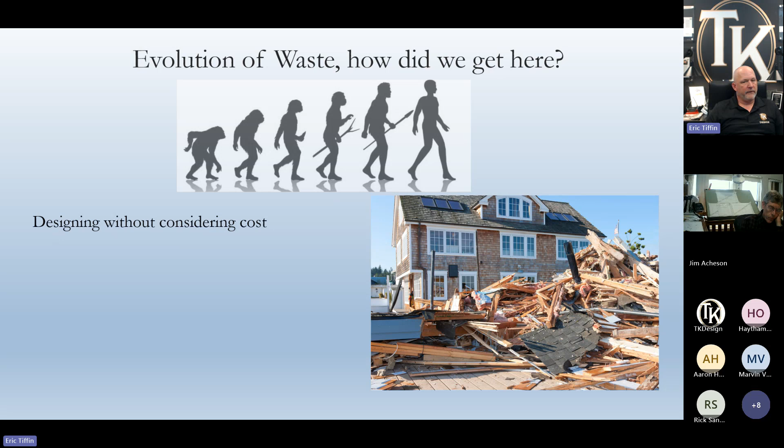Now, how do we get to the point where our homes or our processes have a bunch of waste? There's a lot of factors that can affect this, but as a team here at TK Design, there's some patterns that we notice. Number one is designing without considering cost. There's a million ways to put together a 3-bedroom, 2.5-bath plan, but to get the most bang for your buck, you want a designer that's got cost in mind as they're designing. And not everybody does this, and in fact, most don't. Cost savings really starts when the pen first hits the paper.

And there's code enforcement in different municipalities. Just because a certain building department wants you to modify something, it shouldn't affect every home you build. You could have a designated plan set for each city or project that you're working in with notes and details for that one community. And there's personal preference or ego. Oftentimes builders put stuff into a home that they would want in their own home. The reality is you're selling to your buyer, you're not selling to yourself. You're building for your buyer too, and what your buyer wants may not be what you would want in your own home. Then there's that's-how-we've-always-done-it mentality, and the truth is resistance to change means you're never going to learn and grow.

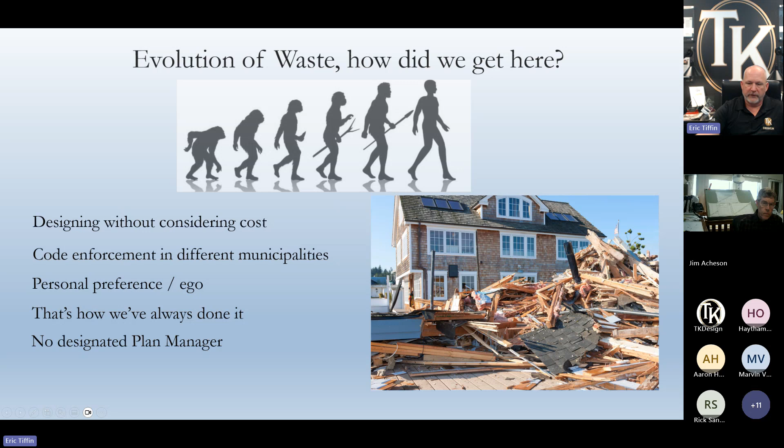And no designated plan manager, this is a pretty big one. We often see this in bigger companies that are selling more homes. You should have one person designated as the plan manager in your organization. Any requests or revisions, no matter who they come from, are discussed as a team and implemented and managed by one person in your organization. And they are the liaison between your team and your architect or internal design team.

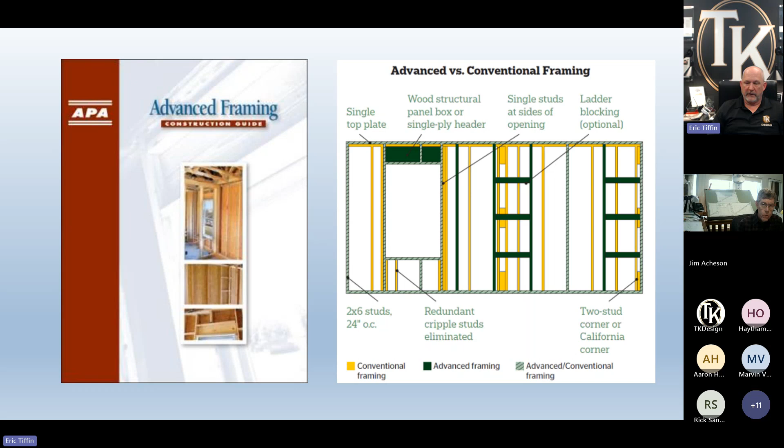Now, the top 7 things we commonly see here at TK Design that, if addressed, can easily save you money on every build. Number 1 is going to be in framing material. The amount of framing material needed for any project can vary greatly. If you compare 2 homes with the same square footage, bedrooms, bathrooms, etc., the framing material needed to build the home could be vastly different. You can easily reduce waste in your material by learning where to look for waste. Now, there's a lot of books out there that are available on advanced framing, and there's some good information in these, but they're no substitute for actual boots on the ground and walking your homes.

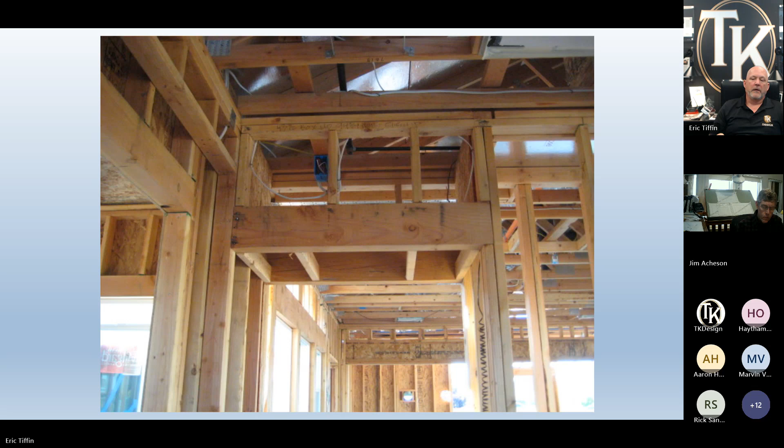Now, thankfully, the price of lumber has cooled down a bit, but we all know the impact that the price of lumber can have on a home. So now more than ever, it's critical to cut waste wherever we can in this area. During one of our many site walks, we spotted this. It was a pass-through from one space to another, and the plans required the framer to drop the ceiling in this area, but had no particular reason for it.

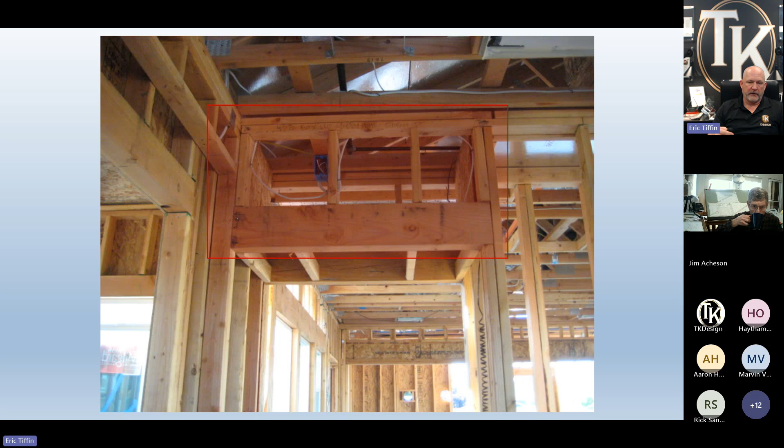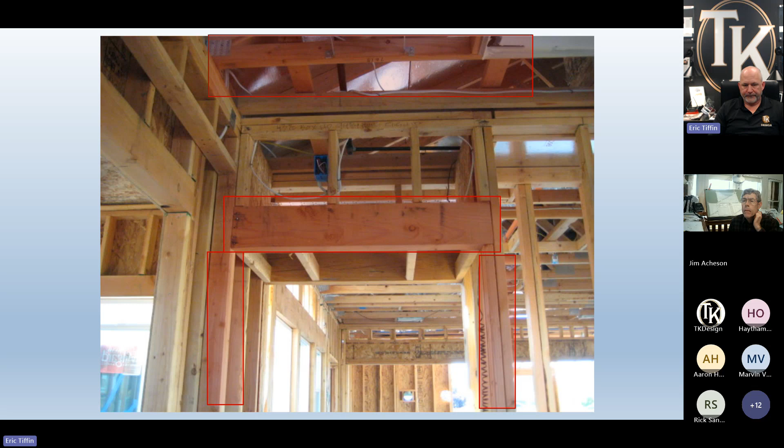So if you look close, you can see the roof framing runs parallel with what could be a header. And then on one side, you got a jack stud under that header, and on another side, you don't. So looking at all this, we see that this is probably a non-load bearing wall. Also see nailers here that are totally unnecessary. Drywall spans 2 foot on center. And in these areas, there's less than 2 feet between them, so you actually don't need them.

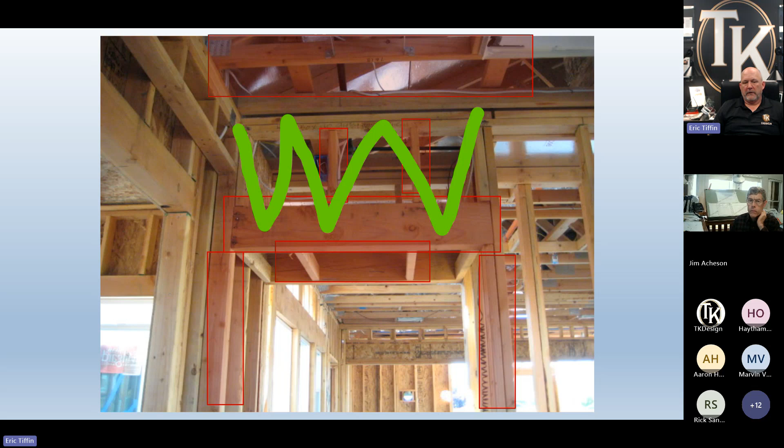I would eliminate this entire thing, savings about $20 for this particular instance. And it doesn't sound like a lot, but imagine this happening 100 times a year. The numbers can get pretty big.

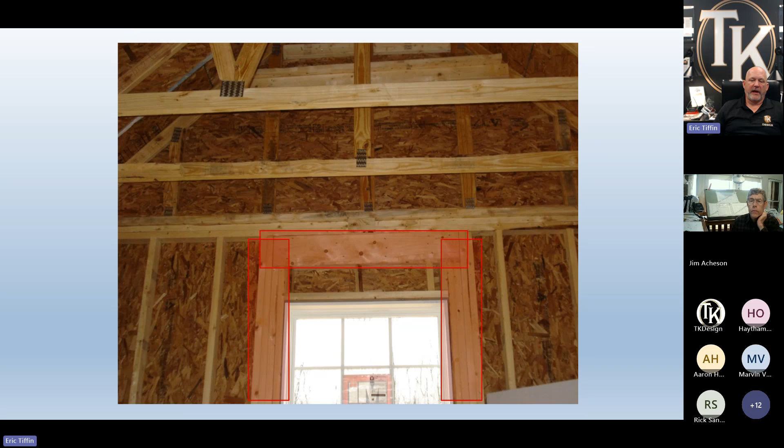Another example here, we see a double 2x6 header with 2 jacks and 2 king studs on either end. The gable end above was siding on the outside. There's really almost no weight there. We could have easily handled this with 1 jack and 1 king on each side of the header with a single 2x header, savings of about $20 in lumber. Now, it doesn't sound like a lot again, but where there's smoke, there's fire. When I see this, I know there's likely several more examples of this in the home.

Now imagine that happening 5 times in every home. And if the builder's selling 100 homes per year, that's about $10,000 in money spent unnecessarily just in throwing extra lumber at these windows. The added benefit to identifying things like this is that there's less labor time involved for your framer, and you could leave space above the window for a little bit of insulation to make a more comfortable home, which can now be showcased to your buyers.

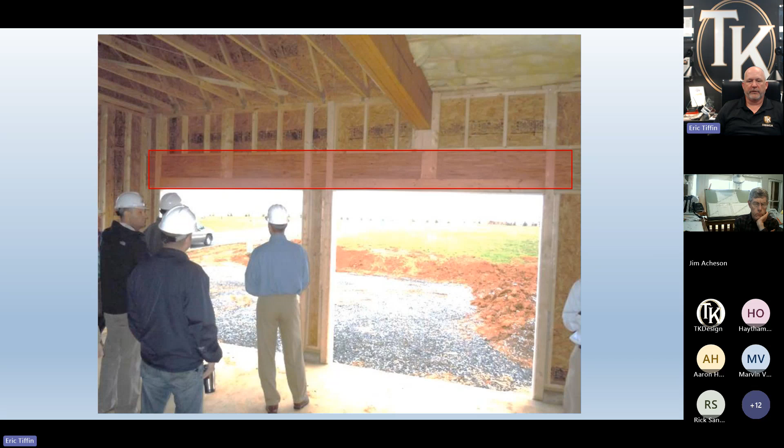Now, hopefully you're all seeing this. We've got a 4-ply LVL sitting down on top of engineered lumber over this garage door opening, which had to extend the full width of the garage because it was a portal frame. We dug a little deeper into this plan set and learned that that original LVL was totally unnecessary because it was intended for an option that got removed, which made also that header over the 2 garage doors completely unnecessary because the weight that was originally planned to be coming down on top of them didn't even exist.

Now, this is quite literally thousands of dollars wasted on this one build, and they've built this home many dozens of times. The message is schedule regular reviews of your plans with your team, and you never know what you're going to find.

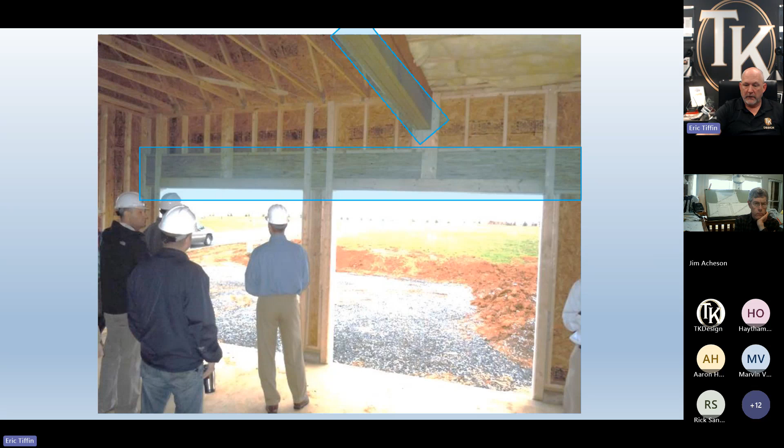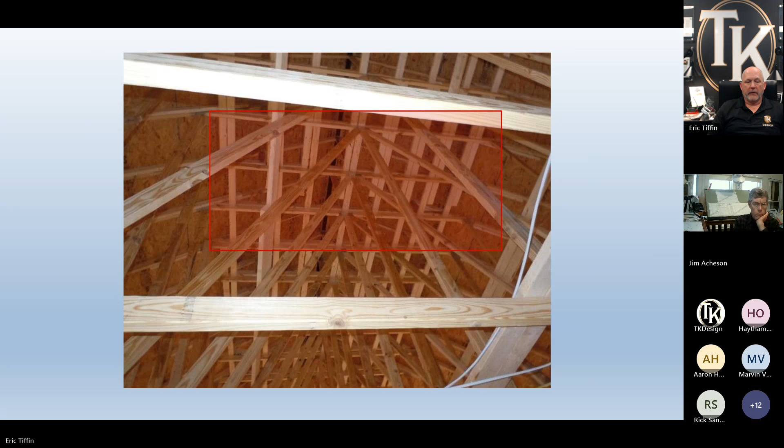Piggyback trusses. There's rules to how wide of a load a truck can carry over the road. If the truss height or load width exceeds those rules, we all know you're starting to add piggyback trusses in, which increases your labor and material costs because the trusses are now coming out in two pieces. A little bit of extra planning, you can lower your roof lines and you can eliminate those piggybacks.

Now, I am going to quote my colleague, Kyle Hunt. Let me see here. I'm trying to find a little laser pointer. I'm going to quote my colleague, Kyle Hunt, in this one. He's owner of Remodelers on the Rise, and here's what he calls his 5 Ps. Proper planning prevents poor performance.

What you're seeing here in the background is like a beam coming in on an angle that's dropped low, and you see the end of the beam cut on an angle here, and there's literally 10 studs surrounding that thing. According to today's prices, 10 studs is about 40 bucks, at least for the numbers I look up from Home Depot. Now, this likely could have been handled with 1 or 2 studs, providing a savings of around 32 bucks.

And the builder was having the lumberyard provide the engineering for this home, which is pretty common. The framer was ad-libbing because there was a lot of information missing from the plans. So he's just throwing as many studs under this thing as he needs to basically cover the bottom of it, and he's throwing 2 king studs on each end. Had my company provided the engineering, we would have called out the proper amount of jacks and kings on this beam. Now imagine this house being built 50 times.

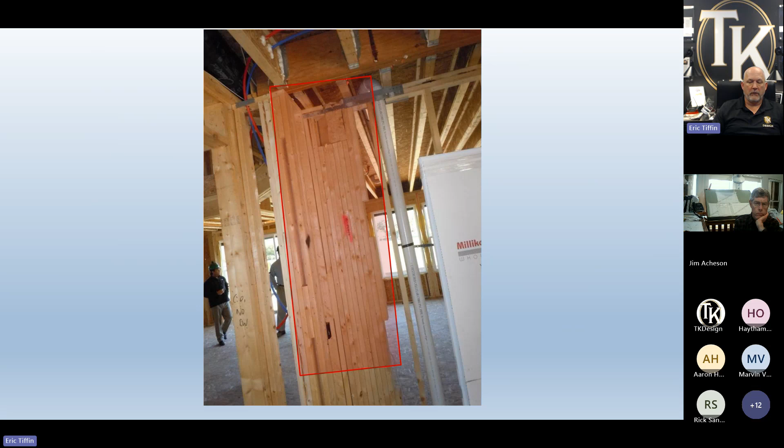That's a conservative $1,600 that could have been saved, plus the added benefit of less labor to install the studs, making the framers profit better, and bringing your company up a notch on the builder of choice ladder. The easier you make it on your trades, the more profitable they become, and the more likely they're going to want to work for you, which can translate into better savings for your team down the road.

Now, here's an easy one. Here we see 2 examples of a perpendicular wall intersection in framing. The one on the left has a full 2x6 stud between 2 more 2x4 studs to provide a nailer for the intersecting wall and for drywall. The image on the right shows the same condition, except the framer used scrap 2x4 horizontally.

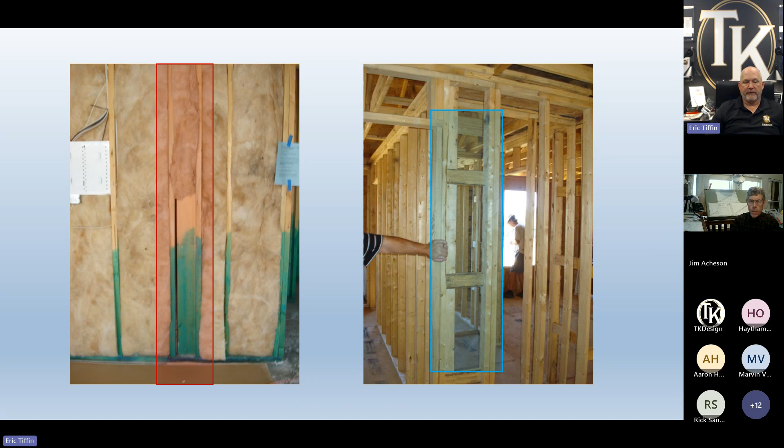I'd estimate the savings of about $15 for the single instance, but it was likely repeated a couple dozen times in the home. Imagine that happening an average of 25 times in one house at a construction company that's building 100 more homes a year. That's $37,500 per year for that one problem that can easily be rectified by providing a scope of work. And that may look something like this.

It's a simple concept that can come with tens of thousands of dollars in savings. The example on the right not only costs nothing, it reduces the amount of waste going into the dumpster. The example on the left shows how these methods actually add more lumber than what's necessary in the plans.

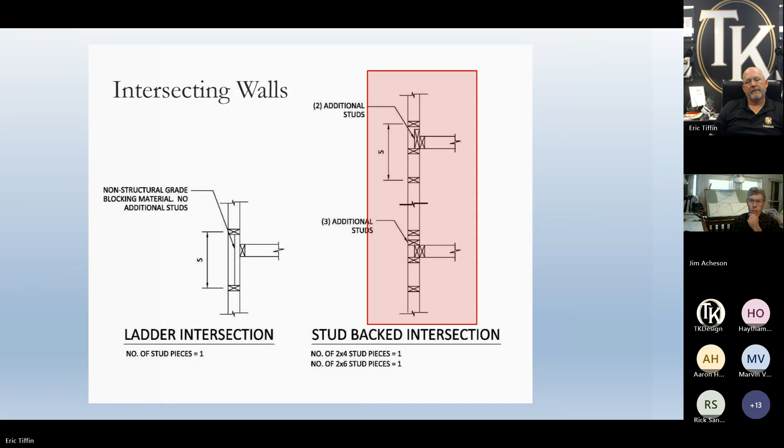If you estimate a conservative average of this happening 15 times in a home, because they have 15 windows or more fireplaces or whatever it is, for a construction company selling 100 homes per year, that's $36,000 that can easily go back to the company's bottom line every single year just for identifying something as simple as this.

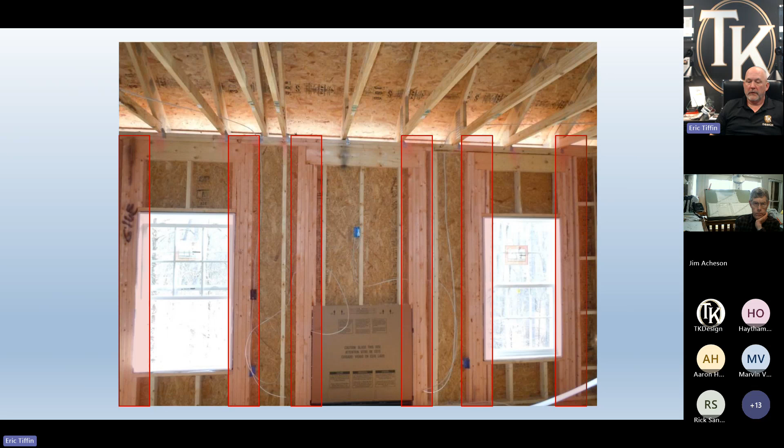Now, if you go the extra step with your architect, have them provide the proper engineering for the home, you can and will save money on every build. By simply calling out jack and king studs in framing, you can easily save that $36,000.

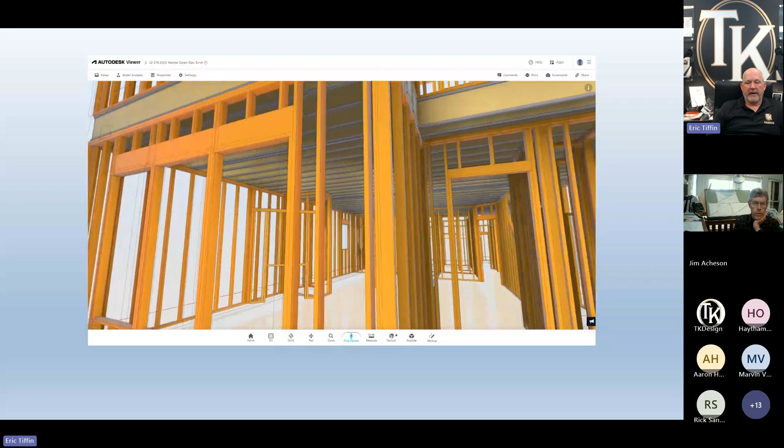Now, here's an example of some technology that we see today. Technology has increased leaps and bounds over the last few years. It's possible to provide a framing layout for your carpenters in a 3D digital model. A link can be sent to anyone and can easily be viewed and navigated on a phone or tablet.

If you have language barriers in the field, which we often see on job sites down in the southern parts, carpenters can now view the model instead of calling on a field manager to help answer questions. And from what we've learned throughout my travels, this can be a very valuable tool that can save the building company countless hours and avoid expensive framing mistakes.

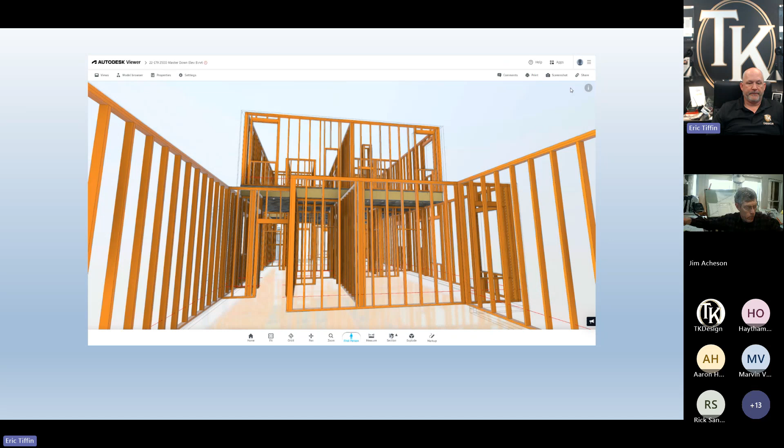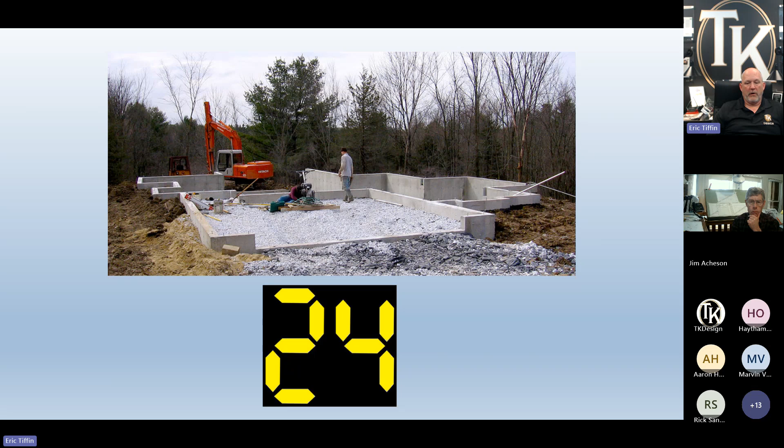Now, picture the impact this is going to have on a two-story home. Each corner is affecting every part of the home, from the foundation, wall framing, floor framing, roof framing, and every interior finish.

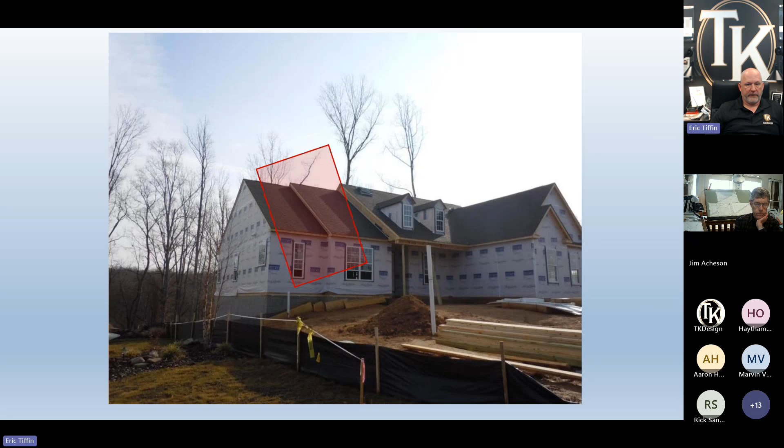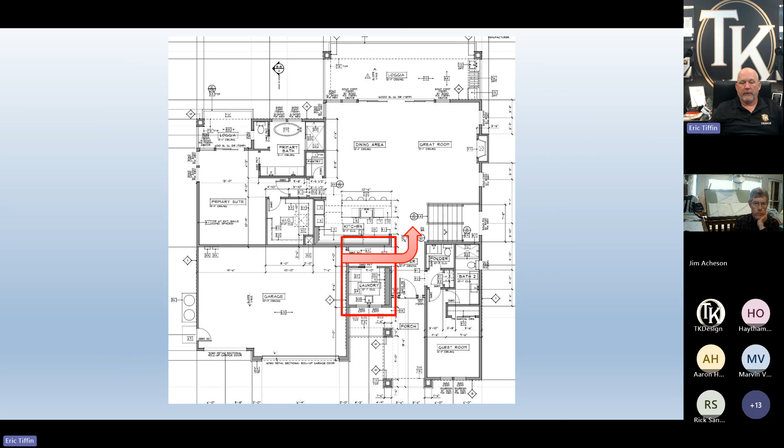Now, here's an example of how to square up a plan to reduce cost. And the goal was to reduce the amount of corners in the foundation. We also wanted to give more definition to the dining room and great room. Now, this plan didn't have a family entrance, and the path to the kitchen was longer than it needed to be, and there was no place to kick off your shoes or store your pocket full of stuff. So we took a stab at this on a redesign.

In this example, we've taken the same square footage and plan elements and reduced them to only 10 corners. We've separated the great room and kitchen, kept a loggia at the rear, but the roof lines have been simplified. The guest suite has improved traffic flow, and by moving it to a more central part of the home, we reduce the complexity of the front porch.

We've created a more appealing family entrance with a shorter path to the pantry and to the kitchen to make it easier to carry in groceries. And we've added a wine bar, which is always a popular option, because we had a little bit of extra square footage.

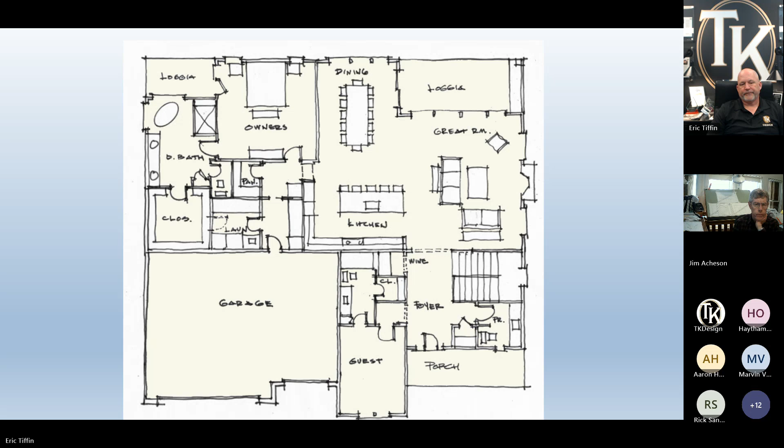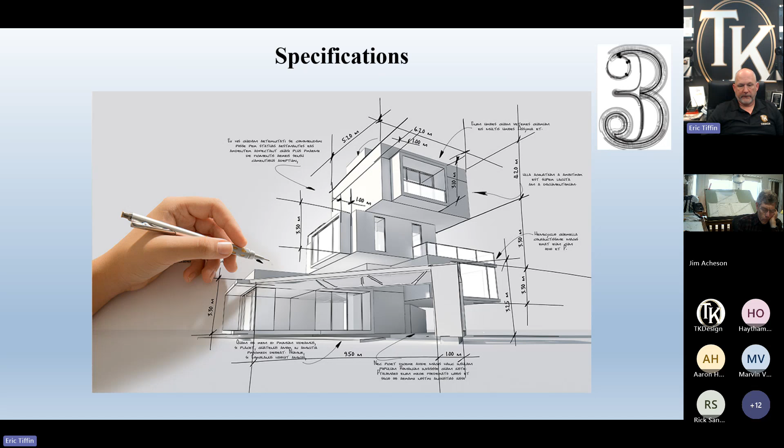Let's talk specifications. Here at TK Design, we don't like to get too specific on brand names, but we want to provide clarity and direction for the trades and suppliers. Having a clear set of framing plans for your trades can save you exponentially.

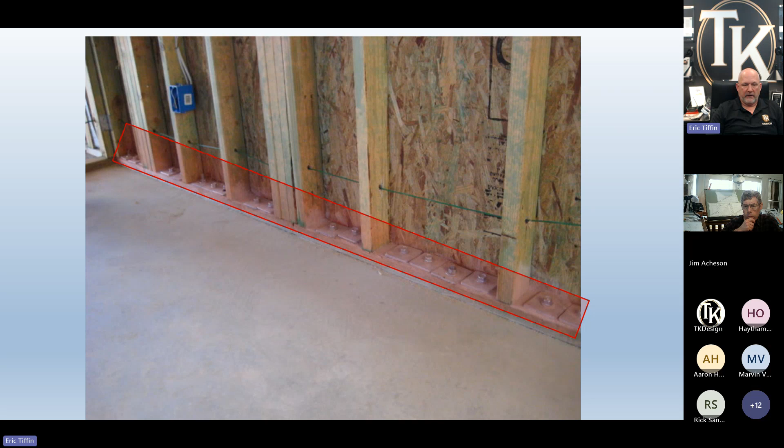Having clear indication of something like anchor bolts, where to put them and where not to put them, can also be important. This particular builder kept having the same issue arise regularly. The bolts are being installed in door openings, and someone had to keep coming back to cut them off. It may seem insignificant, but when you add up the cost of the bolt itself, the time to install it, and then the time to cut it off, the numbers start to get pretty big. Imagine that at 100 homes per year, and it can get quite staggering.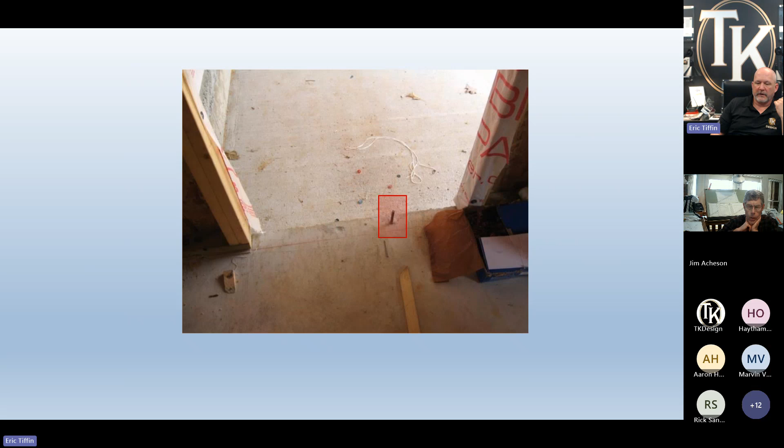A simple way to avoid this is to clearly define where anchor bolts are not installed. And that can look something like this. It's a very simple concept, but if it's a problem that you keep having in the field, figure out a way with your architect or designer or internal draftspeople to mitigate that issue.

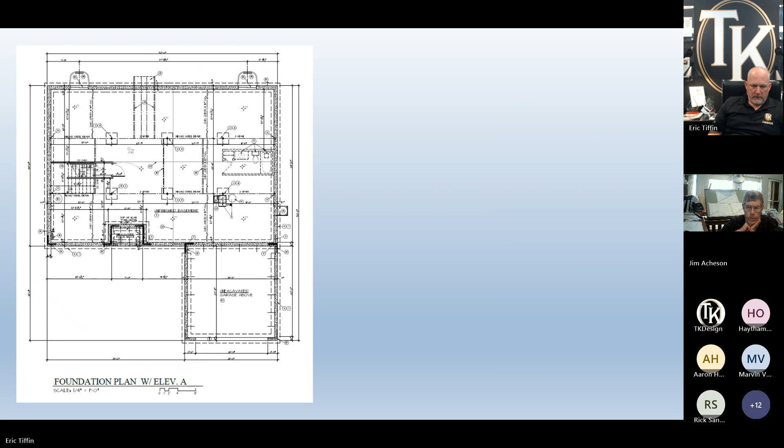Now, this one's some real low-hanging fruit. This actually happened, it was like 2 weeks ago. It's a project we're working on with a client. We are redrawing or designing some new plans for him, and we were using his old plans as reference to determine what his typical building style is.

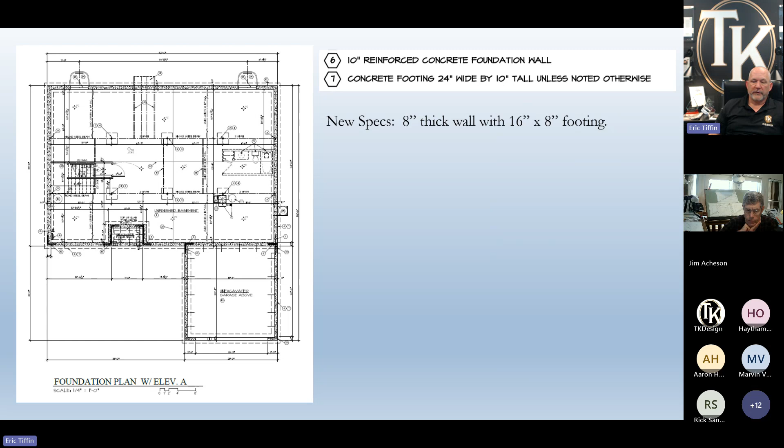And what we saw here was the original designer spec'd a 10-inch thick wall on a 24-inch by 10-inch footing. The soil bearing capacity was over 3,000 pounds per square foot, which means we can easily meet code with an 8-inch thick wall on a 16 by 8 footing. The average linear footage of foundation was around 250 feet for this guy's plan set. The total cubic yards saved by reducing the wall thickness and footing size on average was about 17 yards.

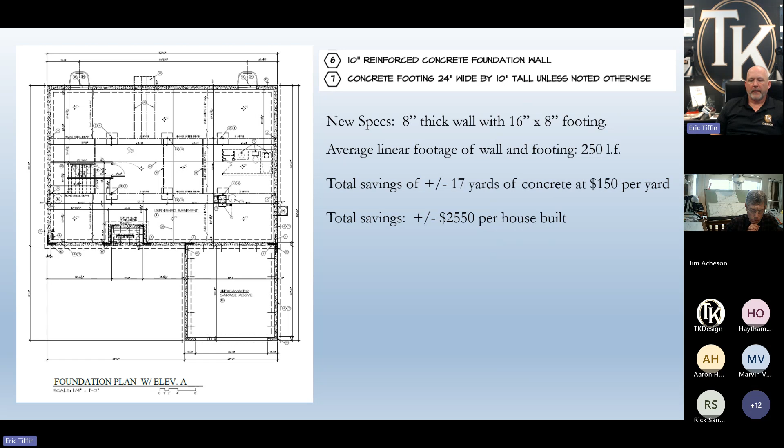And I confirmed with the builder that he was paying about $150 a yard, which translated into about $2,550 per house built. And that's one note. All this was a foundation note that we changed and made it adhere to code. Now, the builder's building 35 homes a year, so he's saving on average $89,250. And if he's building more than 35 a year, the savings just keeps increasing. And remember, this is every year. This is not over the course of his company's life, this is every single year he'll save this money for one very small, simple note in his plans.

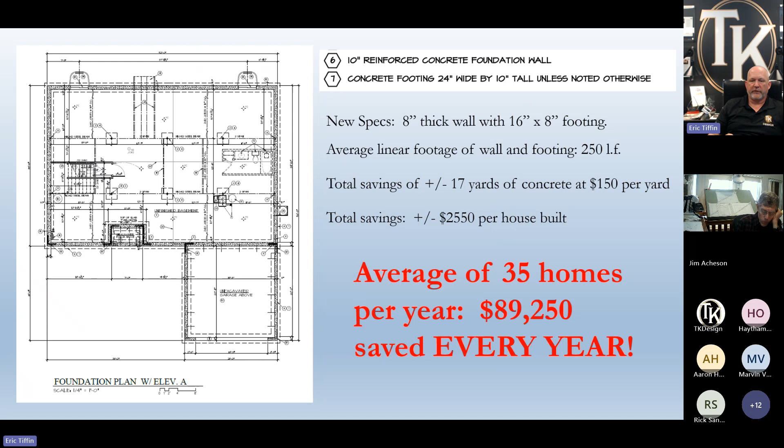Sorry, I'm trying to get to my thing here. Click off. And there we go.

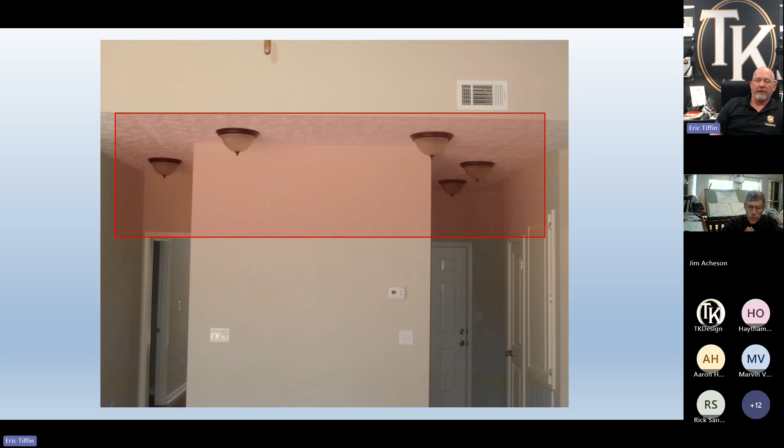This issue occurred on several plans under construction and several other plans that had already been built and sold, which put the total cost at way more than $400.

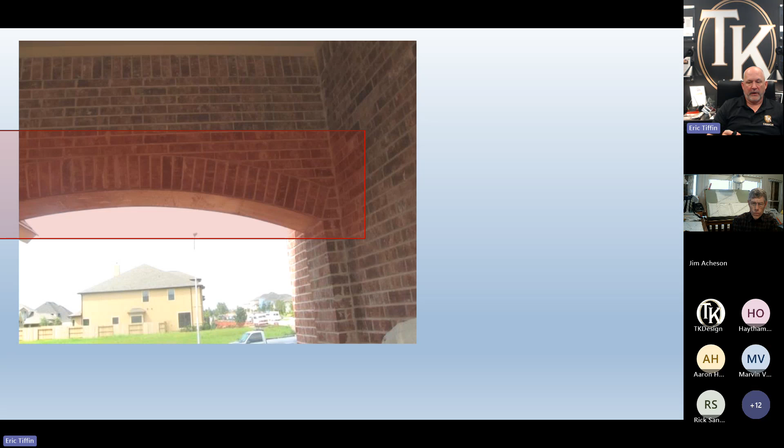Now, this one was a pretty big deal. This company had built this house over 50 times. Every time it was built, they had to order a $1,200 custom steel lintel to support the brick on both sides. If you do the math, that's 60 grand. Our solution would be to change the radius a bit, and then the brick or limestone above can become self-supporting, instantly saving $1,200 a home. But you need to detail these kind of things on the plans.

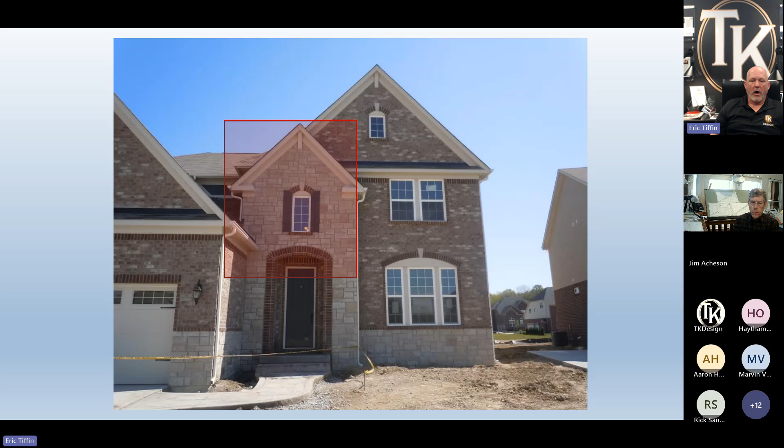And then you tell yourself, well, that's just an anomaly. This doesn't really happen very often, so why worry about it? Then we drove down the street, literally down the street, and there it was again. The message: review your plans, walk your job sites, find this stuff, and you can easily correct it.

Now, here's an odd one. I don't know why anybody would do this. So there's a 4-inch separation on the front wall covered in brick. Then the fascia line drops like a foot or so. And you can see it. It's creating all kinds of complications in the roof, the brickwork, gutters, etc. Why not just flush the thing up, raise the gable end? It would make things much simpler and the elevation would look better.

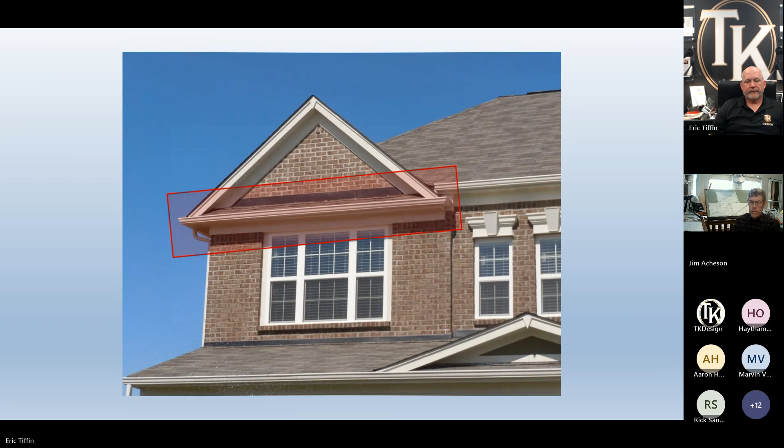I guess I just asked myself, why would you do such a weird buildup on a chimney on a production home? Not only does it cost money, it just looks bad. Remember the 5 Ps we talked about before? Proper planning prevents poor performance. This vent pipe could have been planned better to exit at the rear of the home, or at least in a more inconspicuous spot than on the front of the home, right in front of a window.

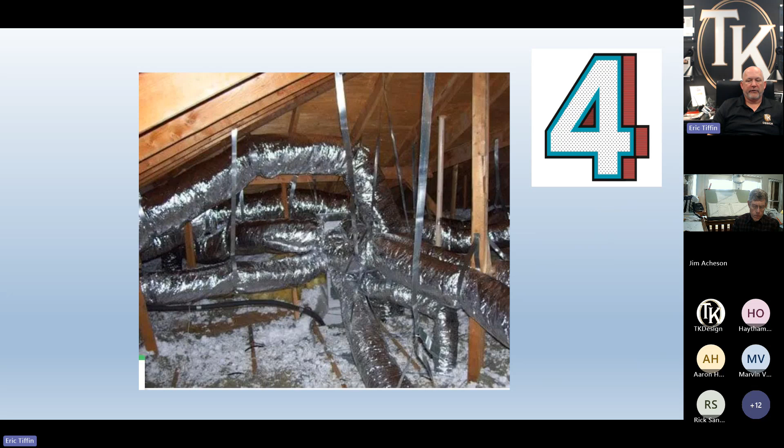Now, number 4, notable source of waste in your mechanicals. Improper layouts, conflicts between trades, gross amount of wasted material, all this can be solved. Now back to the 5 Ps. Proper planning prevents poor performance. Everybody's seen this one a million times, which means it's worth making an effort to change. Work with your architect to provide a plumbing layout. Your supplier and framer can use it to locate drains before it becomes an issue, and you can avoid this also common joist repair.

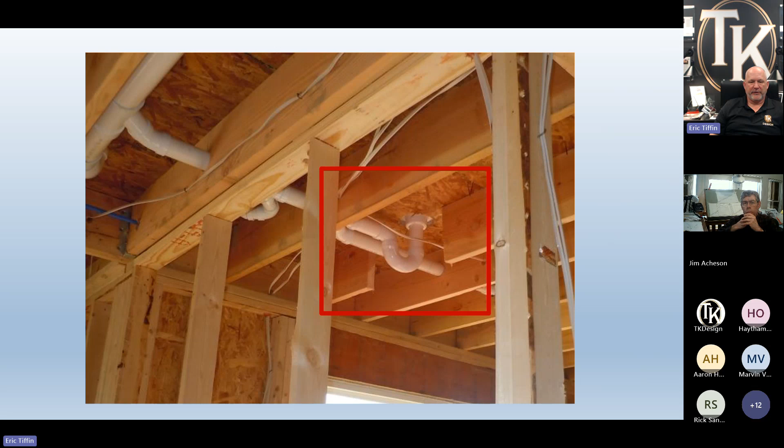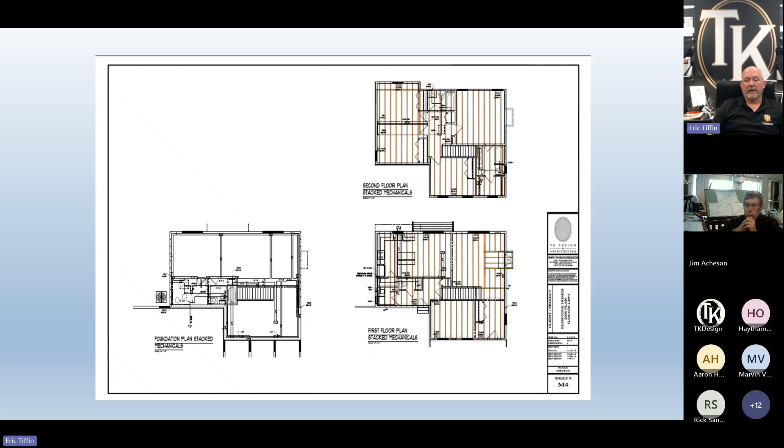Now, looking at this picture, it reminds me of that robot in Lost in Space from when we were kids. Not only does it look bad, it's massively inefficient. A more efficient approach would be to provide a mechanical plan for your trades. And doing so will ensure that if you have multiple contractors, they're all performing the same install. And the added benefit is that you can now compare apples to apples when you're shopping trade contractors. You can also take it a step further and design in a 3D model, eliminating any potential conflict before they ever happen.

Number 5, talk with your trades and get their input. Your trade base has a ton of knowledge, and if you can tap into it, you can save over and over again. Now, does this sound familiar to you guys? A home's under construction, framers have all kinds of questions and issues. Builder handles the issues by fixing the immediate problem, but never digs deeper to get to the root cause. For example, framing job's short of lumber, field manager or carpenter calls a lumber supplier for a hot shot delivery, keeps moving. Builder gets an invoice for hot shot delivery.

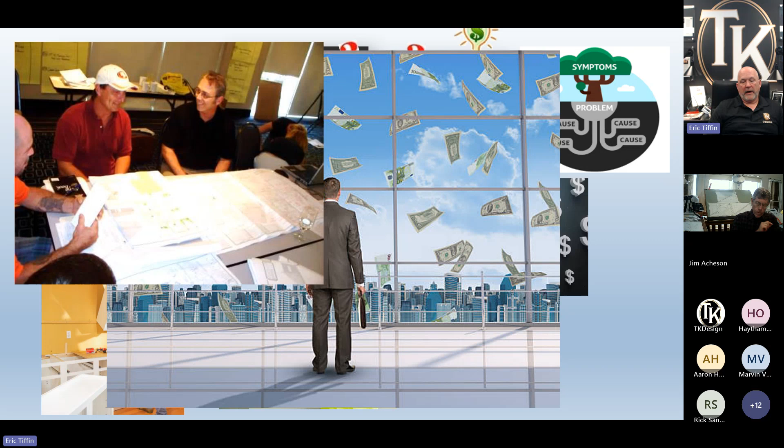A cabinet comes out wrong. Builder orders another one and just keeps rolling. He or she never finds out why it happened in the first place, and it comes out wrong again. And then the builder throws a bunch more money out the window. So learning from our experiences with the True North team and from our own endeavors throughout the years, we've developed a system to tap into the vast knowledge of the trades. We hear their ideas, we create designs, we get their feedback, and we finalize the design concepts and help you build for less.

Trade and supplier collaboration is key to the lean relationship. Sit with your trades one-on-one, go through all your plans, have the hard conversations, develop a strategy forward as a team, and in large part, it has been our experience that the trades and suppliers actually care. They just have never been asked for their input. And if you need help, call on somebody like the True North team who can help you achieve those goals.

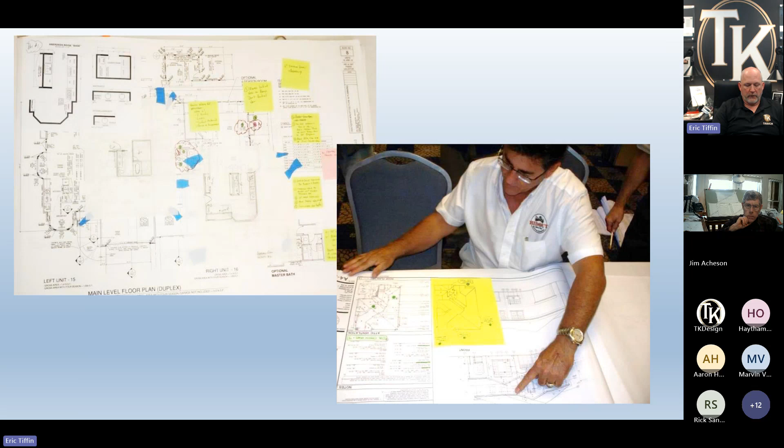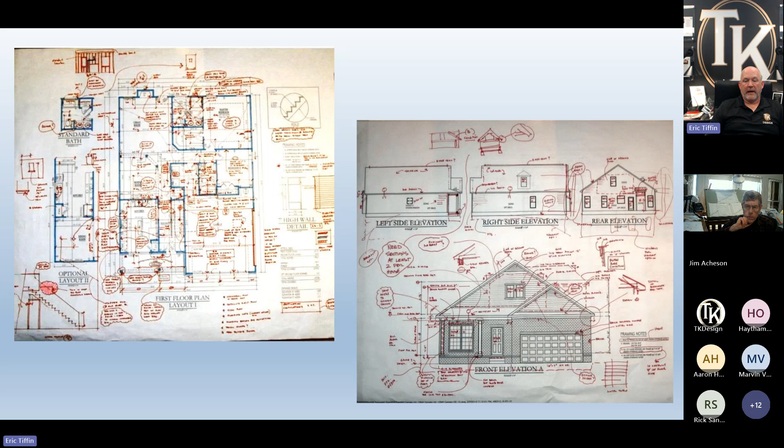For example, this is one of our True North meetings. We were about a half day into the session, and this builder was building about 1,000 homes a year at the time the meeting occurred. Now, imagine the waste that you see here. We noted over 150 improvements on plans alone, all of this coming from the trade partners.

Number 6, create 2 product development teams, one internally and one in the field. Your internal team may look something like operations, which could be the owner of the company, purchasing, architecture, project manager, and sales. Your external team, your field team, would look something like carpenter or framer, lumber supplier, HVAC contractor, electrician, plumber, and any other supplier you feel could have good impact, such as cabinets, windows, etc.

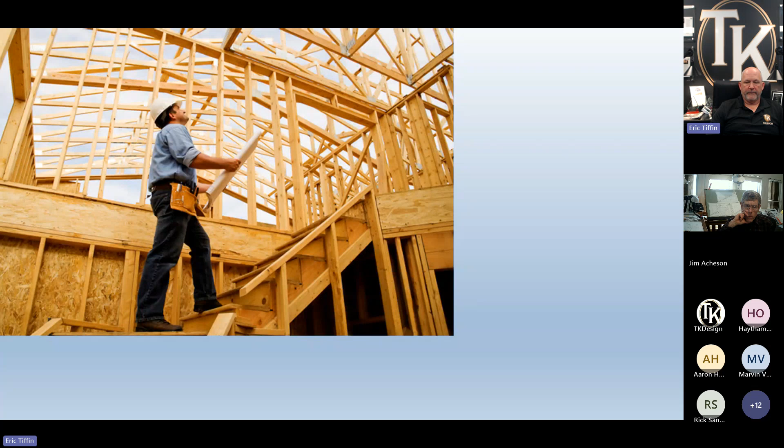Now, it's critical to do an as-built field walk every time you build a home for the first time. Once the field walk's completed, modify the drawings to match what was built. You'll now have an accurate set of plans going forward that you can keep building from. You'll find some interesting things when you start walking your houses with your trades.

One of them we see all the time is half walls for islands or peninsulas. They're always installed incorrectly, and they end up getting torn out all the time. Ask yourself the question, why does this keep happening? Because a lot of times the framer's guessing in the field where a number of dimensions have been tweaked and the wall is installed in the wrong place. We found best practice is to indicate critical dimensions, and this helps eliminate mistakes and tear-outs in these sort of items.

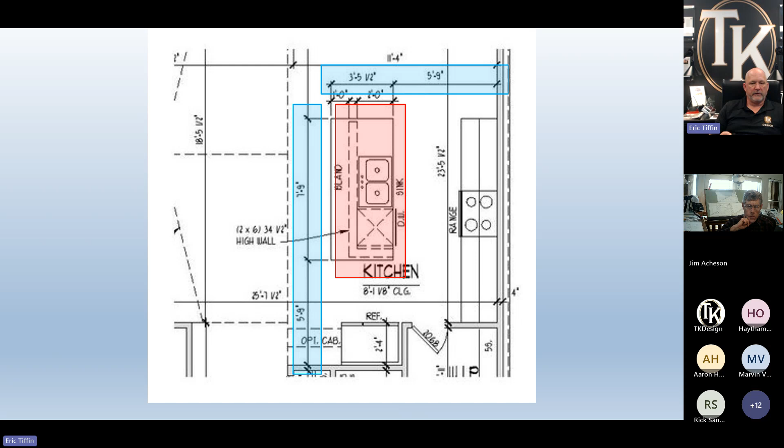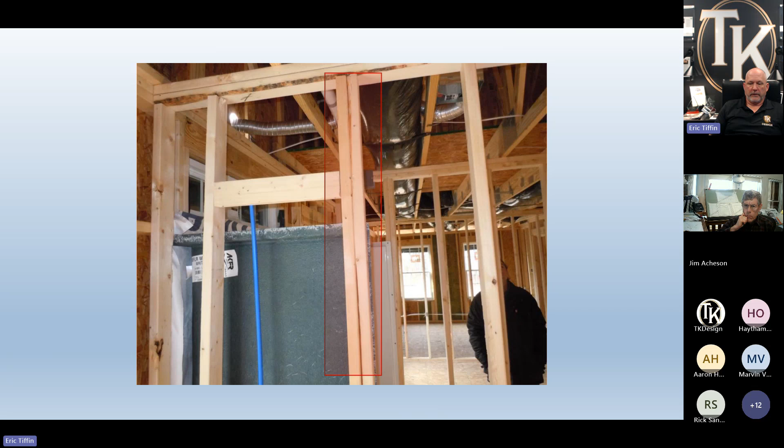Now, this one seems quite simple. It's a harmless tub nailer. Problem is that it's almost always getting done at punch-out. If it were clearly dimensioned on the plans, it would allow the framer to put it in while building the wall and save time and money on having to come back and do it later.

Now, lot specifics are very important. I often see builders or production builders working off master plan sets. So imagine, I'm sure a lot of you have seen this, a 2,500 square foot house with multiple structural options, framing sheets, electrical, plumbing, HVAC, all the things. This plan set can easily run 100 pages or more.

Once a buyer purchases the home and creates a list of desired options, someone from the building company goes through this 100+ page plan set and they circle things that apply to this home, then they X out things that don't. Then they hand that over to their trade contractors, this 100-page set, and now the trade contractors have to sift through all these unnecessary notes and details to get their job on time and in budget. I've actually seen trade companies that have employed somebody full-time simply just to go through all the red line plan sets because they couldn't keep it all straight.

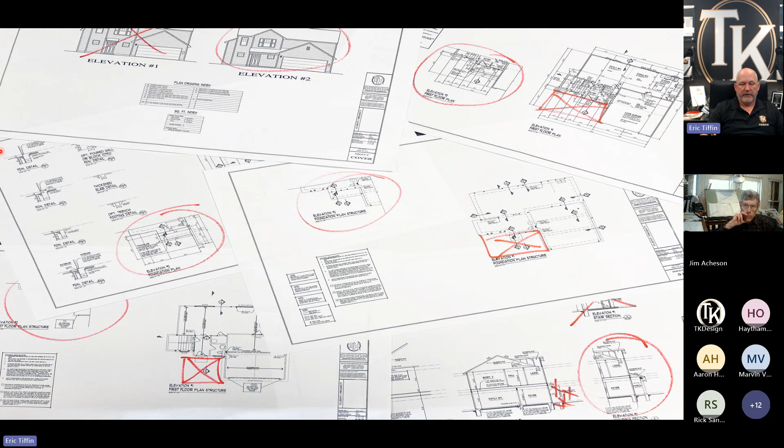Now, my question is, why not develop a lot specific plan for every job to make it easier? And the pushback I usually get is, well, because doing it this way is faster and cheaper. Reality is, one mistake in the field can easily cost more than 10 lot specific plan sets, and we see this all the time. So I say scrap that idea. There's definitely a better way.

Instead, develop a process to create a lot specific plan set for every job. When your team sells a home, have the sales checklist sent to your architect. He or she can use this to create a plan set unique to your particular job. Negotiate a flat fee upfront with your architect for this, and work together to decide what a feasible time frame would be to get a plan complete and build the time and cost into your business model.

You can now pass this plan cost onto your buyer, and you have a built-in amount of time to manage into your schedule. Now the project managers no longer spend time redlining plans, and you avoid costly field mistakes. It's a win-win-win for the builder, for the trades, and for the buyer.

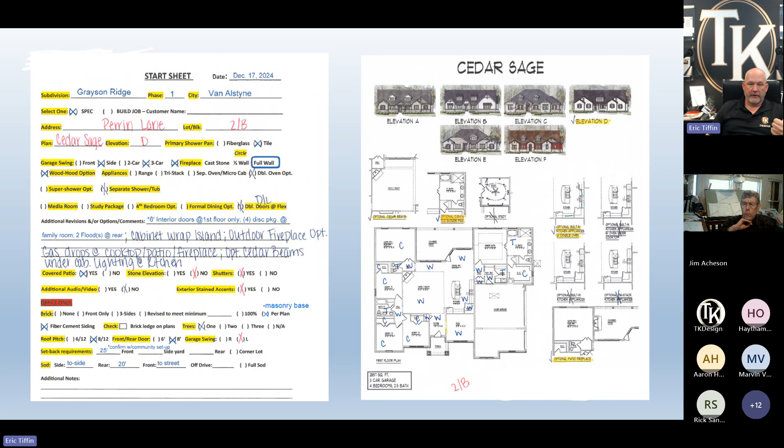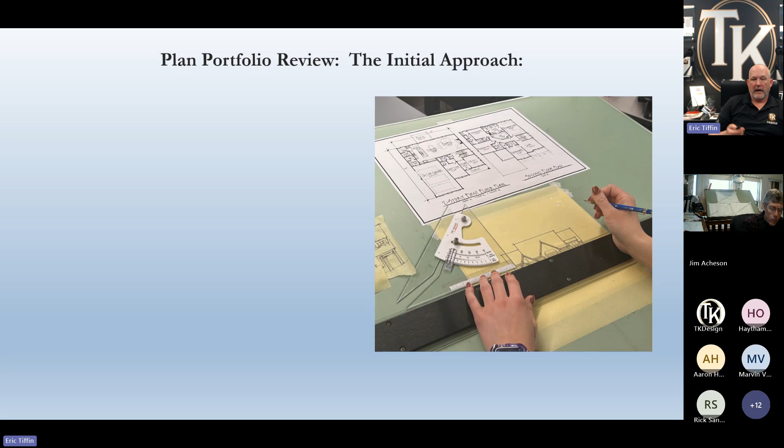Now, I've talked a lot about what to look for in the field. Now let's discuss how you can do a thorough plan review on your own plan sets. Sit down as a group, and I emphasize as a group, not individually in your offices. Everybody come together, sit down with your plans laid out in front of you. Ask yourself these questions. Are your floor plans up to date? Are your elevations up to date? Are you offering structural options to allow buyers to upgrade? Do you have too many plans, which we commonly see?

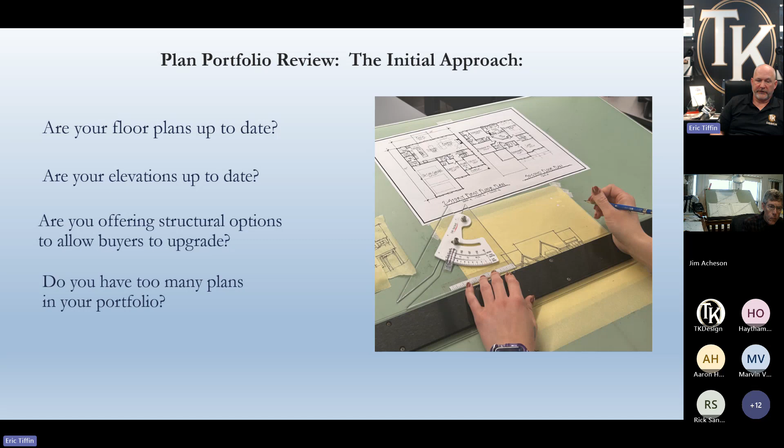Once you've identified all those items, you start doing a details review. Are you offering enough elevations per plan to create a good streetscape? Can you make minor plan adjustments to reduce cost? Do you have consistency in your plan sets and in your details? Are details clear and understandable?

Are there any details missing? Do you have overlapping square footages? And are you covering all the square footages that your competition is selling?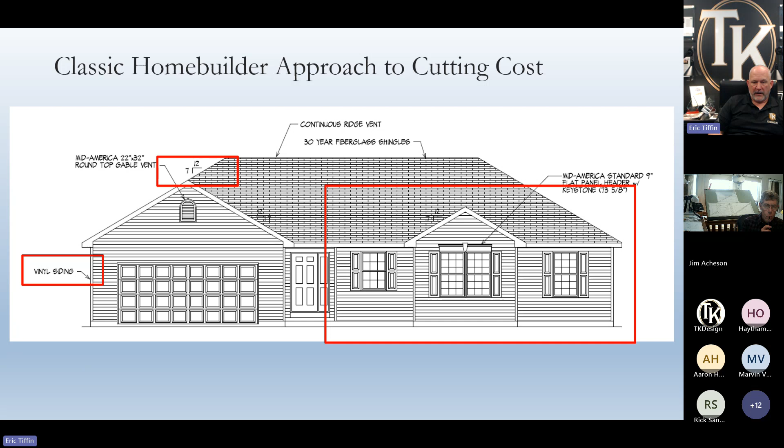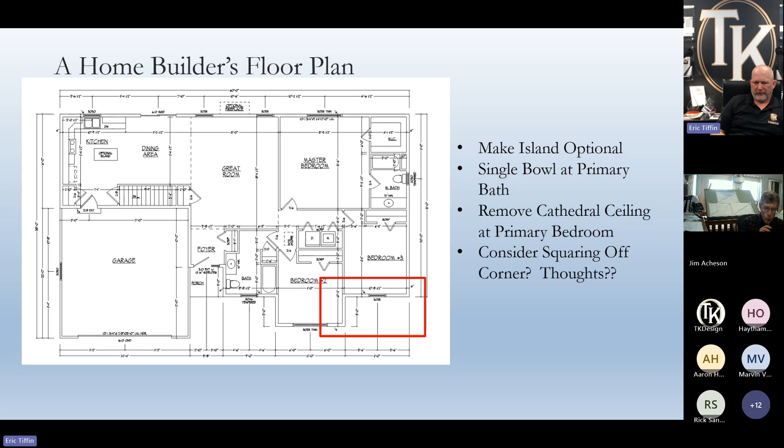His plan was to reduce the brick by switching to vinyl siding in areas. He dropped the roof pitch of the house. Inside, he took the kitchen island and made it optional. He put one sink in the master bath instead of two. He took out the cathedral ceiling that was in the master bedroom. And they considered squaring up the front elevation to try to save on cost, but ultimately decided not to because it increased square footage.

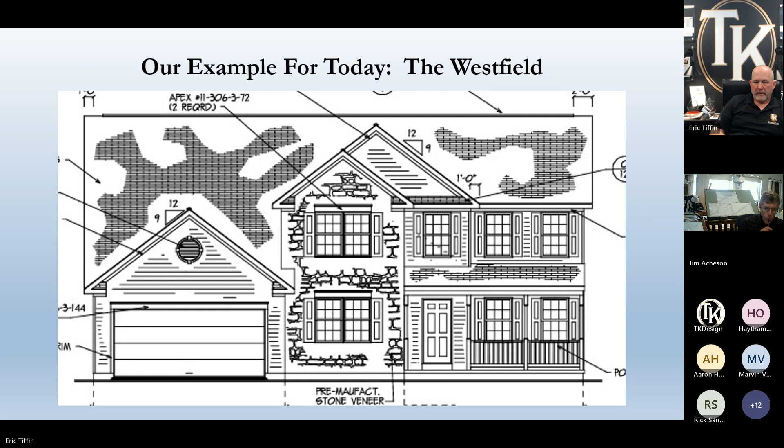Now, we started to evaluate a two-story plan that he was using as well. Now, instead of approaching this one from the builder's perspective, we did it from a designer's perspective. Right here is an example. This is actually a shot of the floor plans that we started with.

Now, I started at the foundation. The original foundation had a 10-inch wide block wall with an 18-inch wide footing. The block wall is labor intensive, and the original footing is too wide. Instead, form and pour the wall 8 inches thick and reduce the footing width to 16 inches. Poured walls can reduce labor cost and decrease days in cycle time.

Take this piece of steel, slide it towards the front, shorten the steel beam, and eliminate 3 columns with 3 column pads. Use I-joist instead of solid sawn for longer spans and less callbacks for squeaks. You may also reduce the steel and labor cost by using less beam lines.

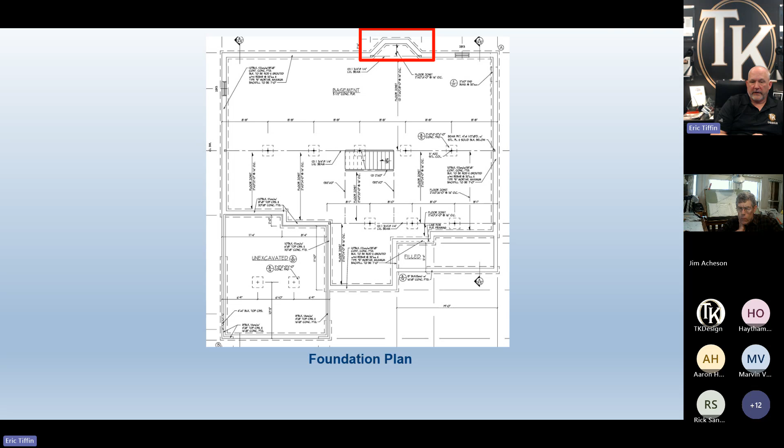Form and pour all foundations. Don't use trench footings. Foundation can now be done in 1 stage instead of 2, which can easily decrease some cycle time. And you don't need a foundation under a bay window. You can either get rid of the foundation and cantilever the bay or get rid of the bay completely.

On the first floor, the nook is way too tight to fit a decent table. There's a bunch of angles in there that add cost to the cabinetry, and there's no good way to furnish the family room. The formal dining room and living room are outdated. Get rid of them. Use the square footage in other places or reduce the footprint size, or both.

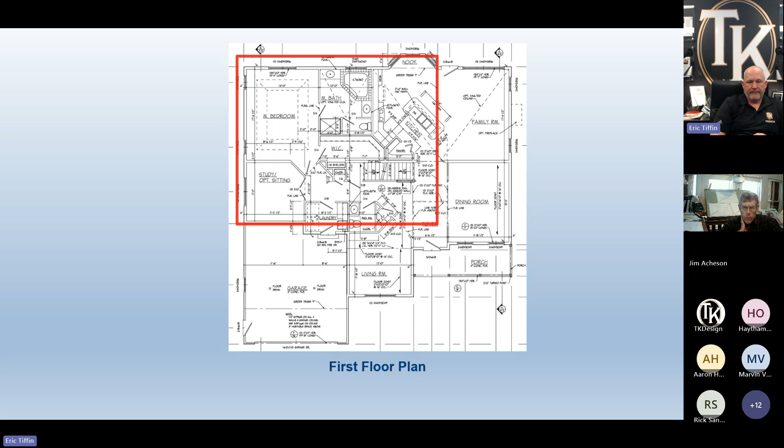The laundry's tight. There's no real place to sit and kick off your shoes. The primary bath has an outdated tub deck and a jacuzzi tub. And this plan is full of angled walls, which create dead space and make the plan feel choppy. Now, this is one of those instances where spending money upfront to save money and sell more homes makes sense.

Instead of trying to lean down this plan, we opted to completely redesign it, keeping the square footage and the plan elements in mind. The redesigned version has less square footage and a smaller footprint, and we kept the important elements and eliminated unnecessary rooms. The kitchen lays out better without all the angles, and it's now easily accessible from the garage. We've integrated the dining into the kitchen and eliminated a separate dining area.

The study increased in size. We had additional space in this home, so we were able to add an extra riser in the stairs to make it more comfortable to navigate. The walk-in closet got bigger.

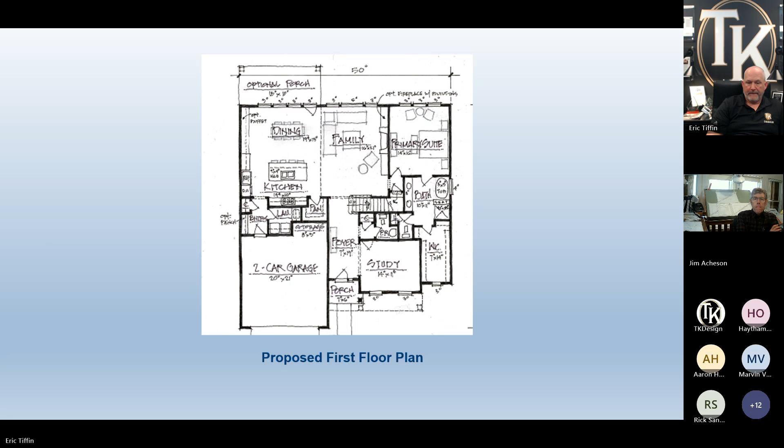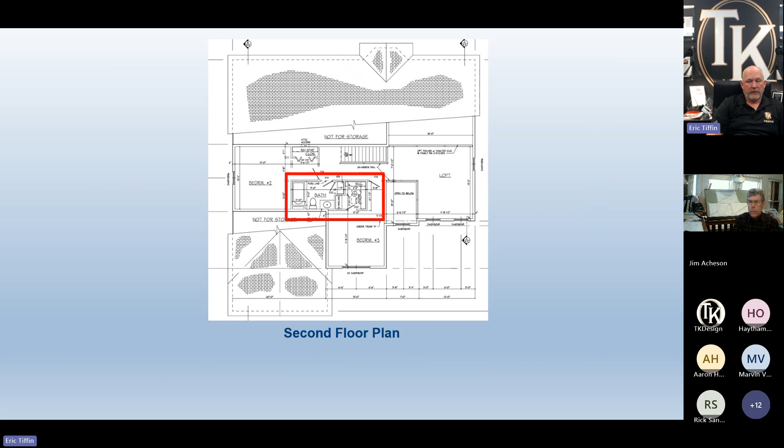In the second floor, we see an odd layout that creates long sloping roof lines on front and back and reduces the possibility of views at the rear and front of the home. The bathroom has a single sink, there's no natural light, and the toilet was part of the entire space, making the bathroom single use.

The revised massing allows a more efficient and attractive elevation. It stacks the framing directly over walls below, which will reduce framing cost. We have a much better main bath with dual sinks and a concealed toilet and a window for natural light.

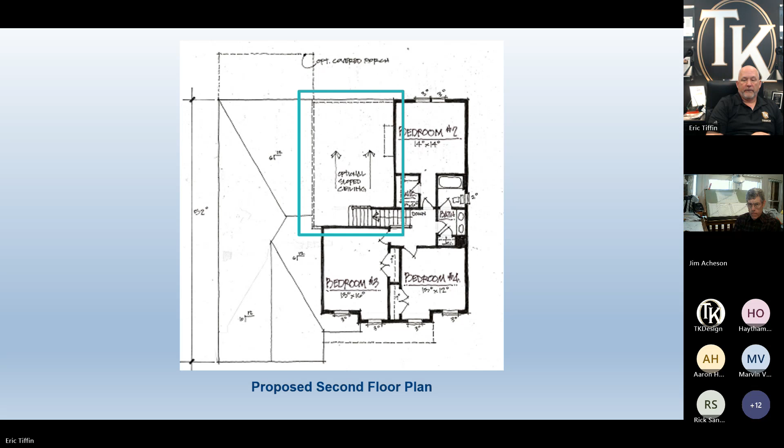We've even created an opportunity to offer an optional slope ceiling and high glass at the rear of the home. Of course, this would come with an upcharge for the high profit margin for the builder. Now, the comparison shows better views out the back, more natural light flowing into the floor space, and again, a slope ceiling and high glass being offered as an option at the rear.

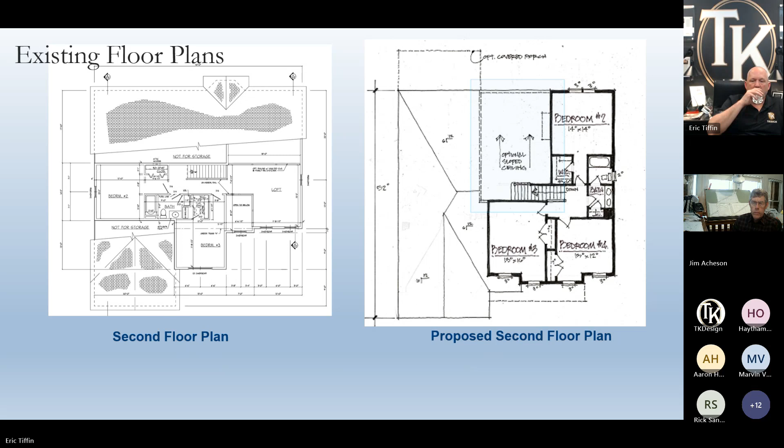The original front elevation doesn't really follow a true style. It's more like a patchwork quilt, just stealing elements from different design styles, which kind of reduces its curb appeal. We got some stone, but there's too much of it, and it looks out of proportion. The shutters are completely overused. These are actually adding cost.

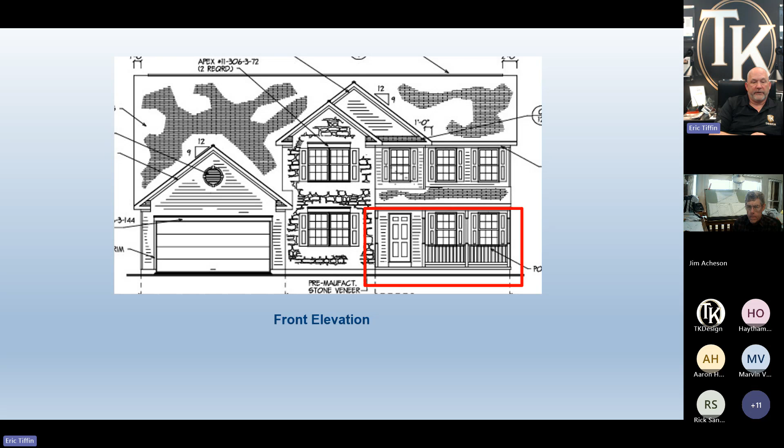Imagine these are about $100 a piece once you install them. And they're taking away from the curb appeal because they're done incorrectly. Shutters should at least appear to cover the window, even if they're just attached to the wall and don't operate. Now, the quoins, they're adding labor and material cost. The porch is quite large and has unnecessary railing, and the roof massing's quite unattractive.

The new elevation allows for a timeless style, which offers more curb appeal and will bring in more buyers. We've simplified the overhang, reducing labor and material costs. The stone accents fit well with the style. There's less of it, but it looks more proportionate. The new roof massing has less square footage and brings better curb appeal to the plan. And we reduced the porch size and eliminated the expensive railing.

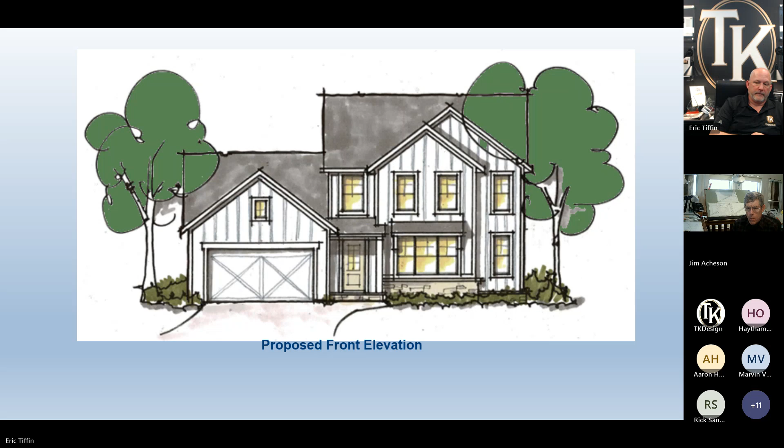Now remember, buyers aren't designers, but they can still be affected by bad design subconsciously. This new elevation is likely going to bring more buyers in the door. Now on the sides, we see these steep roof lines taken from the first floor to stay over those front gables and to fit the second floor up inside of it. The original plan has 26 windows. Our redesigned version has only 20.

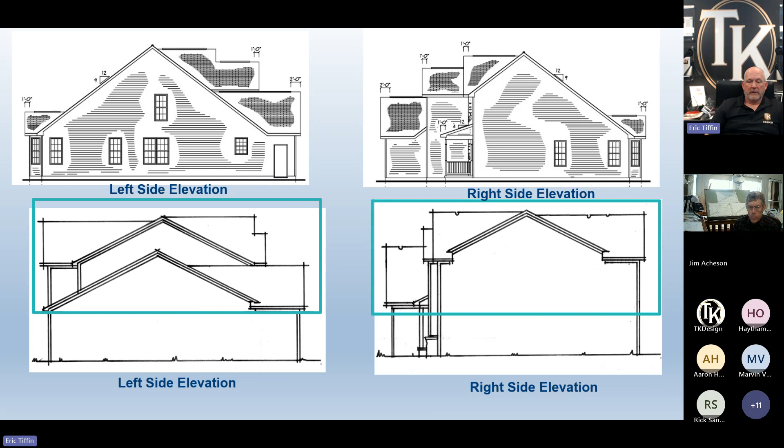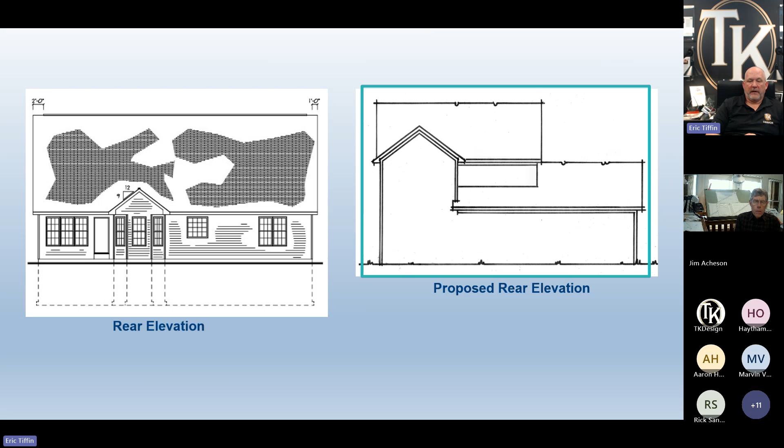The long roof massing increases cost and reduces curb appeal. And you can see in the redesign version, we've reduced roof pitches and increased curb appeal by eliminating the long roof massing. At the rear elevation, again, we see that bad roof massing, this outdated bay window with a full foundation. And our new version has less roof massing and a better look from the rear of the home, and we've eliminated that expensive bay window.

Now, on that house, the original sale price was $510,000. We targeted the savings to be 10% of the original sale price to bring it down to about $459K. Direct construction cost is assumed to be 50% of sale price, or $255K, which means our target construction cost is $229,500. Our target savings was $25,500.

The actual savings that we saw was $30,600 after we repriced it, which put an additional margin of $5,100 with no discount. We increased the value of the home by about $10,000 due to better design, which means our total margin gain was $15,100 for this one home, yet we still brought the price down, potentially bringing more buyers in the door because we've lowered the price.